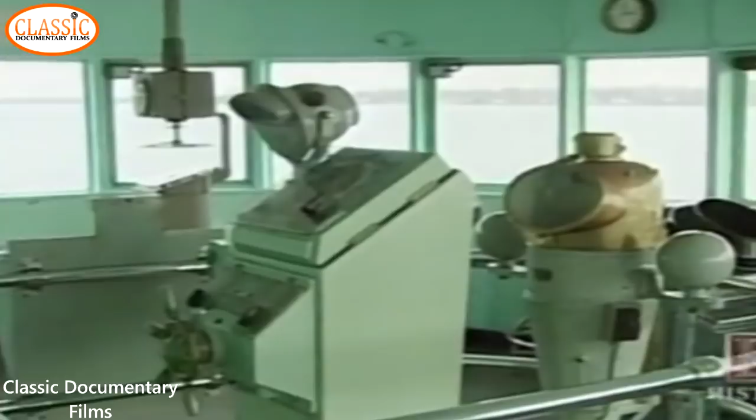This is the radar unit on the William Clay Ford. It's very similar to the one that was on the Edmund Fitzgerald. The Edmund Fitzgerald's radar unit, however, that night was out. For whatever reason, both units didn't work.

Why both of the Fitzgerald's radar units didn't work remains a mystery. There were no reports of problems before the ship left port. It's possible that the huge waves or high winds disabled the antennas on the Fitzgerald's roof. But the Anderson battled the same storm without any radar problems.

The other option they had was to use the radio direction finder. With this, they could triangulate their course. However, the Whitefish Point sending station was out of service. On shore, the radio direction beacon at the Whitefish Point lighthouse didn't work. The storm had knocked out power, and the backup generator didn't kick in as it was supposed to.

These failures may have doomed the Edmund Fitzgerald.

At about 3:30 in the afternoon, McSorley reported to Cooper that one of the fence rails, part of the sturdy safety fences on each side of the Fitzgerald, had snapped. He also said 2 vent covers were missing, and the ship was listing to the side, evidence that water was entering the Fitzgerald. These were all signs of severe damage, but the ship soldiered on, pumping out water as it went.

Those first images of the wreck, and footage from many other dives over the years, showed that the ship lay in two pieces on the bottom of Lake Superior, with its back, or stern, resting upside down.

The ore pellets from the cargo hold were strewn about, and the middle 200 feet of the ship had disintegrated into small pieces. But finding the wreck didn't provide answers to the questions about what caused the Fitzgerald to sink, and why the crew never called for help.

More than 3 decades later, strong opinions still surround the theories of the ship's tragic fate. A Coast Guard investigative board looked into many possibilities. Probably the only one they could confidently rule out once the wreck was discovered was the possibility that the Fitzgerald had broken in half on the surface.

The ship didn't break in half because the bow would have floated for a while longer and the stern would have floated for a while, and they both would have disappeared a little bit further apart. Instead, the two pieces of the ship lay only a few hundred feet apart.

In terms of official findings, the Coast Guard report issued on July 26, 1977, concluded that water crashing on the deck and leaking through cracked and poorly sealed hatch covers was the most likely cause of the disaster. The seals on freighter hatch covers were often damaged during loading and unloading, and crews often skimped on the tedious process of tightening most of the hatch cover clamps.

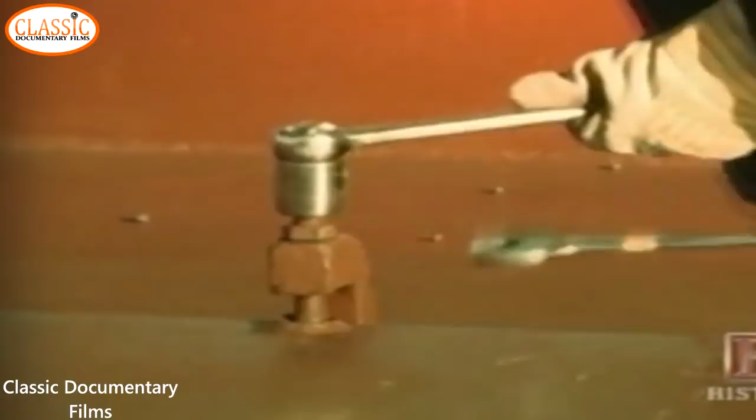Still, many people disagreed with the Coast Guard's theory. If water was leaking in through the hatch covers, then the pumps that were on - these 7,000 gallon per minute pumps, and there were 2 of them going - should have been able to keep up with as much water as these hatch covers would allow through leaking.

The Lake Carriers Association, which represented 15 shipping companies, protested to the National Transportation Safety Board, which issued its own findings on May 4, 1978.

The NTSB also focused on the cargo hatches, but in a different way. It felt the tremendous weight of the water crashing across the Fitzgerald's main deck, known as the spar deck, forced one or more of the hatches to implode and swiftly flood the cargo hold.

You can tell by the size of these things, the 729-foot freighter - these things weigh tons, and it would take an awful lot of weight to cause them to implode.

Finally, the Lake Carriers Association proposed its own theory, that the Fitzgerald struck bottom in the shallow waters around Caribou Island, a plausible consequence of the ship's navigation system failures. Hitting bottom could have caused a rupture in the hull below the waterline. The downed fence rail and missing vents McSorley reported near Caribou Island seemed to bolster that scenario.

This was serious. How serious? Not serious enough that McSorley thought he couldn't continue on. He had his pumps going. He thought he had it under control.

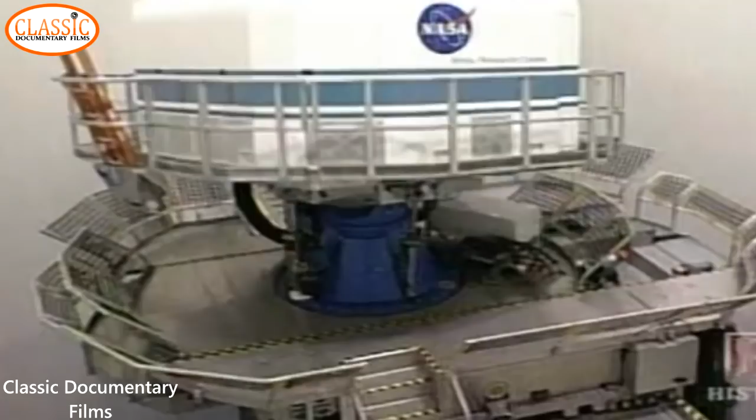To test the motion effects recorded from the US Air flight in 1994, investigators went to the NASA Ames Research Center in Northern California, home of the world's largest flight simulator. Unlike other simulators that simply pivot on a stationary platform, the center's vertical motion simulator can move 60 feet up or down and 40 feet side to side.

Pilots that we've had from all over the world who have come in to fly the vertical motion simulator say that it replicates flight like no other simulator they've ever been in.

Technicians loaded information directly from US Air 427's flight data recorder into the simulator's computers. Computers ready. Operate. The result, seen here using the same US Air flight information, was a chilling reconstruction of what the crew most likely saw and felt.

As we roll out, there'll be a wake vortex upset that resulted from a 727 that was flying ahead of the 737, and that started the maneuver. Right there you feel the wake vortex upset. The pilot then tries to right the airplane, but during that process the rudder goes over hard to the left, and as a result the airplane rolls uncontrollably to the left. It must have been terrifying in the cockpit.

Nothing from the work in the vertical motion simulator led investigators and motion experts to believe that pilot error or disorientation were factors in the crash.

They returned to the rudder control system, but could still find no sign of malfunction. Then, a vital clue: in June 1996, an East Wind Airlines pilot reported rudder problems. It seemed like the hydraulic system of his 737 was actually pushing back when he depressed the foot pedal that controlled the plane's rudder. Luckily, the plane didn't crash because the incident didn't occur during takeoff or landing.

This incident led NTSB investigators to examine how the rudder could have moved opposite of the pilot's control. They focused on the hydraulic heart of the system, the rudder's dual servo valve power control unit.

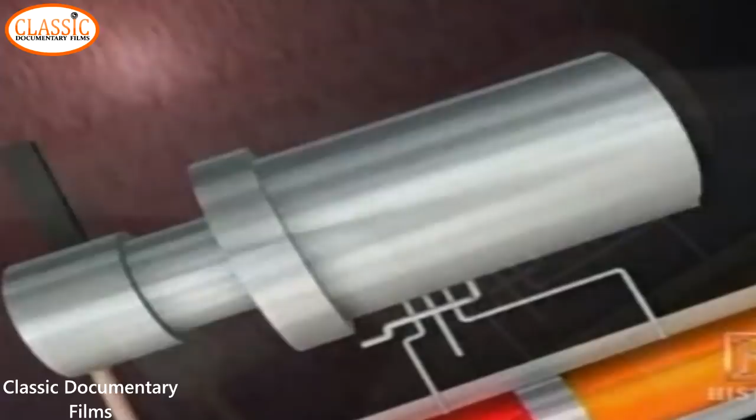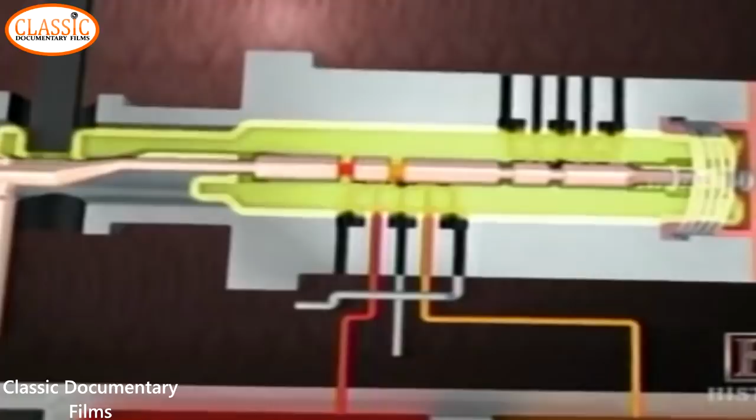It's about the size of a soda can, and inside is a valve about the size of a pencil that's got ridges in it, and it moves back and forth and ports fluid. That's the primary valve. Around that is a slightly larger valve, cylindrical in shape with ports in it, and that's the secondary valve.

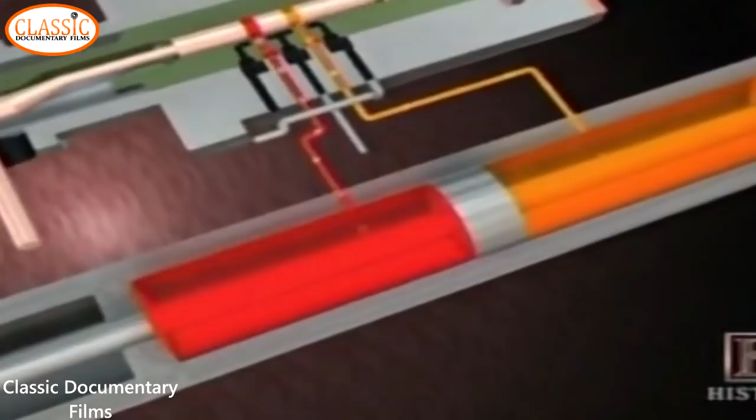When a rudder is operating normally, only the inner primary valve is supposed to move. Depending on which direction a pilot wants to turn, the hydraulic pressure either extends or retracts a piston, which then turns the rudder. Once the pilot's foot is off the pedal, the pressure is released, and the rudder returns to a neutral position. The outer secondary valve only moves if the smaller primary valve becomes stuck.

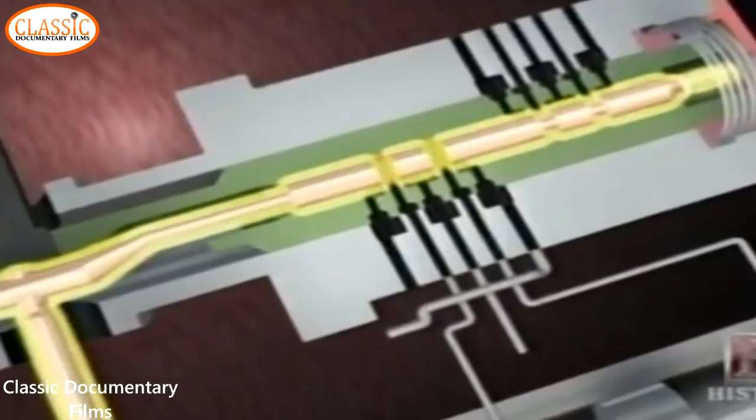Virtually all aircraft systems have both a primary and a backup, an important design feature known as redundancy in the airline business. But since the 737's rudder power control unit used two valves within the same hydraulic system, the valves were not totally independent of each other.

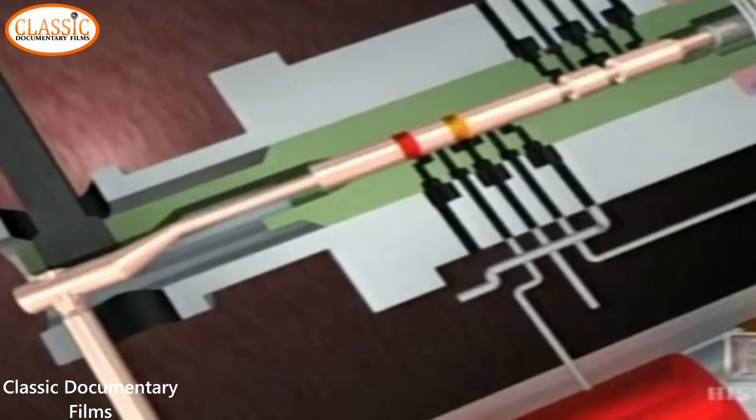In 1998, investigators discovered how the valves had created the deadly problem. We saw that if the secondary valve were to be jammed just slightly off neutral, and you put in a high rate command into the primary valve, you could misport the hydraulic fluid and cause the rudder to reverse operation. This would be very similar to driving your car.

You turn to the right, the car goes left. You probably will keep trying to turn to the right. You won't figure that out before you go off the road. The longest NTSB aircraft investigation in history was finally over, 4.5 years after the US Air 737 crash in Pittsburgh.

Instructors immediately taught 737 pilots ways to correct the problem, such as momentarily removing a foot from the pedal to release pressure in the event of a jam, and switching from the primary to the secondary hydraulic master control for the entire aircraft in order to free the rudder.

The training continues today because the new units with two completely separate rudder control systems are still being installed. In fact, the retrofit process won't be complete until near the end of the decade. However, the planes are still safe in the meantime, thanks to extensive pilot training. And the 737 seems destined to remain the workhorse of the industry as the design changes are completed.

In 1959, just 30 miles from downtown Los Angeles, a little-known nuclear disaster began to unfold at an important Cold War facility. The Santa Susana Field Laboratory, created by the government's Atomic Energy Commission and operated by Rocketdyne, played a vital defense role by producing powerful rockets.

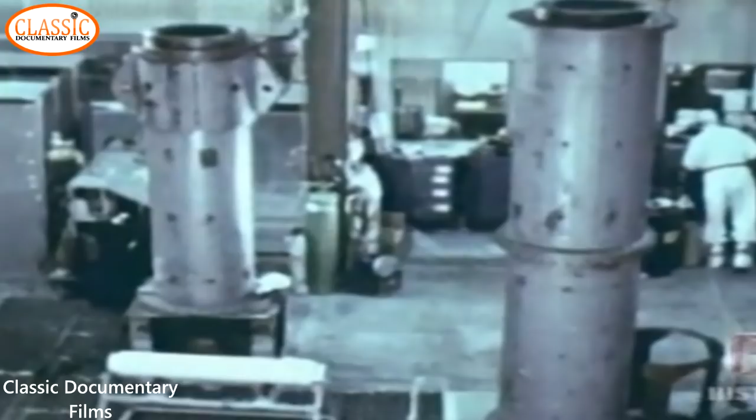The 2,800-acre site was built in the hills above Simi Valley, a town of 8,000 just west of Los Angeles' San Fernando Valley. Besides rockets, it was home to several experimental nuclear reactors, which the Atomic Energy Commission hoped could be commercially viable.

One of them used sodium instead of water as a coolant. It was known as the Sodium Reactor Experiment, or SRE. But the experiment would soon trigger a technological nightmare.

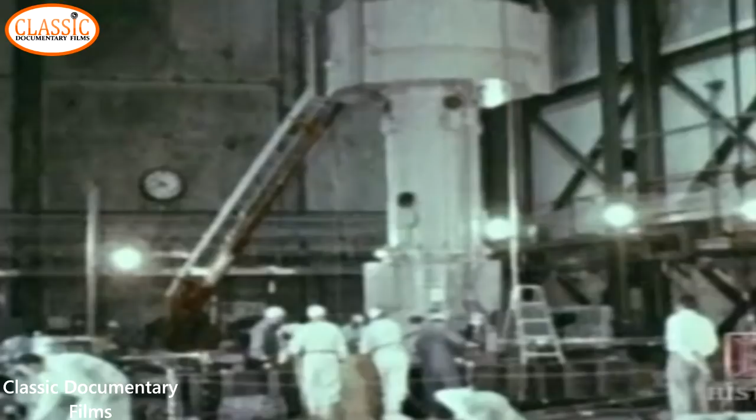This reactor was built in an era of nuclear cowboys. The Atomic Energy Commission came out of the Manhattan Project. There was a culture of secrecy, and a sense of excitement about pushing the limit on these reactors.

On July 26, 1959, technicians barely managed to manually shut down the sodium reactor when temperature and radiation readings quickly jumped. Then, after 2 hours of basic inspections, they made a baffling decision. They started up the reactor anyway.

When they dropped a camera into the reactor core, they discovered that 13 of 43 radioactive fuel rods were damaged and partially melted. And because this was an experimental reactor, a thick concrete containment structure, such a familiar and vital part of more modern reactors, wasn't required.

It's just built in an ordinary industrial building. And in fact, it was designed so that radioactive gases would be intentionally vented from the reactor to holding tanks and then out into the environment.

Exactly how much radiation went into the atmosphere is still a matter of debate, because the monitoring equipment at the facility could only measure very minor levels of radiation.

This was a much smaller reactor than the one at the site of the famous 3 Mile Island accident in Harrisburg, Pennsylvania in 1979. But because it didn't have a containment dome, the sodium reactor might have created a much bigger problem. The SRE was about 1/100th the size of 3 Mile Island.

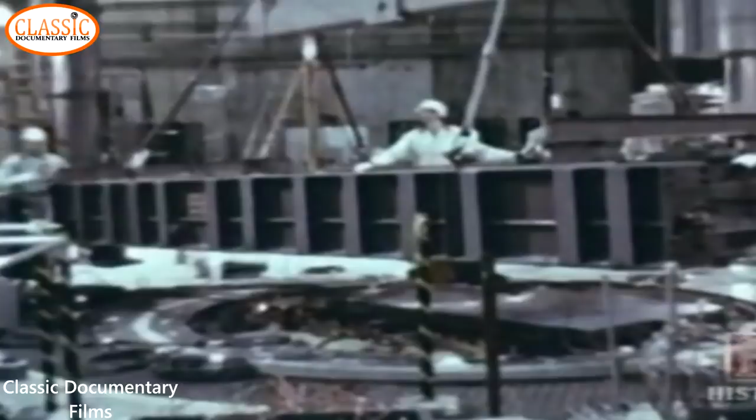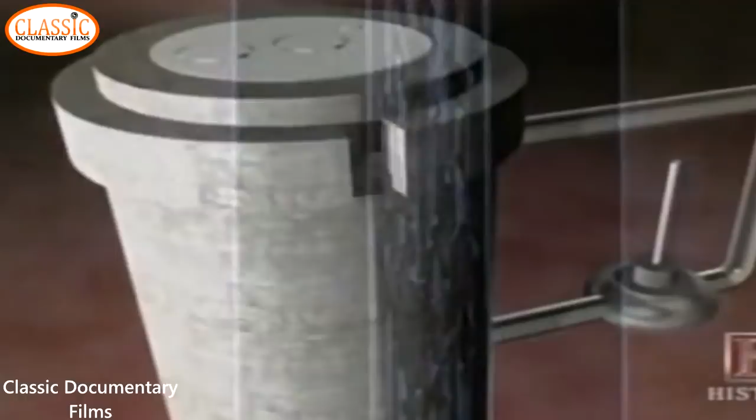It also explained exactly what went wrong inside this unique reactor, where molten or liquid sodium was used instead of water to remove heat from the swimming pool-sized reactor area.

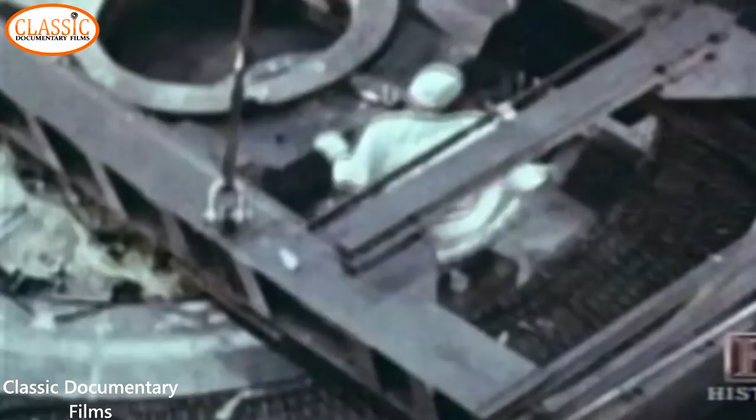Sodium reactors were being developed because there was a concern there wasn't enough uranium to fuel all of the nuclear reactors being built at the time. Sodium reactors never deplete their original fuel supply. Water reactors are less efficient, since they consume uranium and eventually need to be resupplied.

But the benefits of liquid sodium came with a price. Sodium burns in the presence of air, and explodes in the presence of water. So the reactors had tremendous danger associated with them.

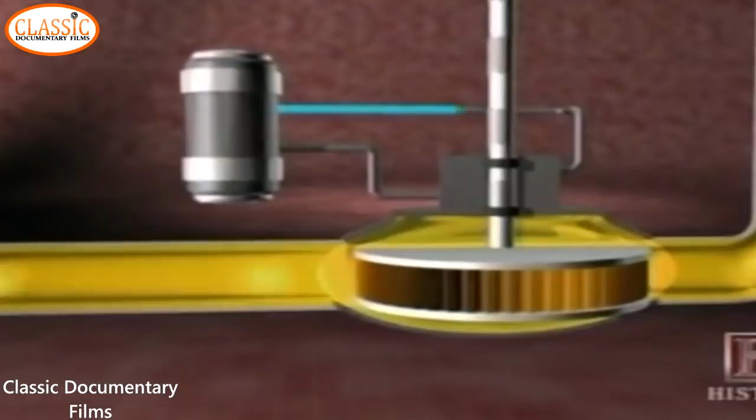Because water couldn't be near the reactor, a chemical known as tetralin was used to cool the bearings in the pumps that circulated the sodium as it carried heat away from the fuel rods.

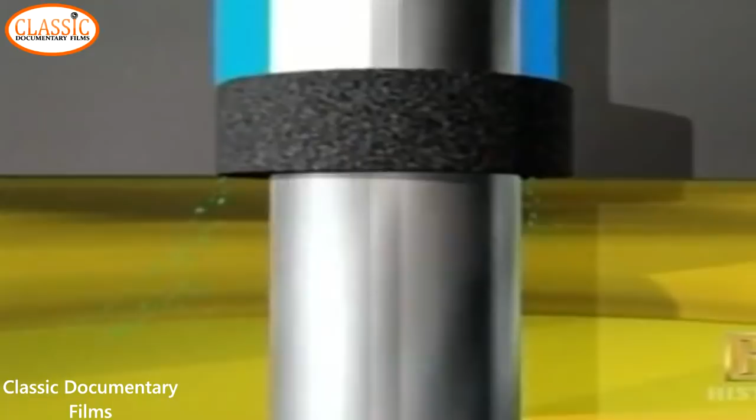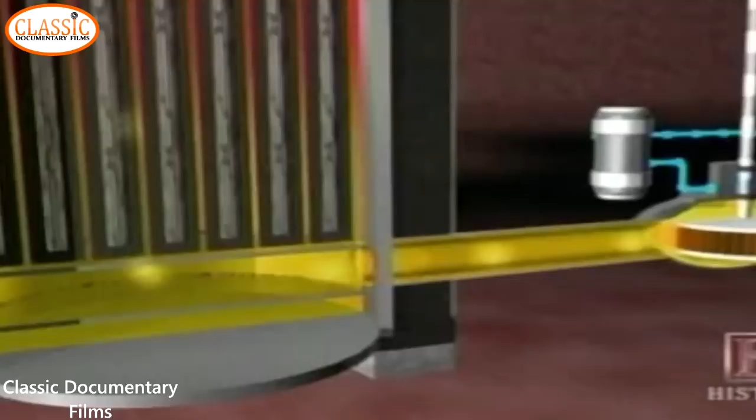Everything worked well until tetralin started leaking through cracks in the pump seals and into the reactor. The neutron bombardment inside the reactor core caused it to turn from an organic chemical into an almost glue or tar-like substance. As the tetralin approached the fuel rods, it partially blocked the bottom of some of the coolant channels.

When coolant flow decreased, the heat by those fuel rods increased and eventually reached melting point. What happens when the fuel starts melting is the radioactive byproducts, which have been created from reactor operation, have to go somewhere. So those radioactive byproducts go into the molten sodium, and some of those byproducts come out as a vapor, and in this case, went into the air.

Some of the radioactive materials, like strontium, are actually absorbed by the body into the bones and teeth, so they remain in the body for a long period of time, all the while releasing radioactivity that can harm cells and other parts of the body.

Workers who cleaned up after the accident or worked at the facility once it was restarted were at highest risk. The studies that were done of the workers by a team from the UCLA School of Public Health found that the workers who had the highest radiation exposures had tripled the death rates from cancers such as cancer of the lung, lymph, and blood systems, as similar workers at the site who had lower radiation exposures.

The University of California at Los Angeles was also responsible for bringing the story to the public. After the 3 Mile Island accident in 1979, some of Daniel Hirsch's students started wondering if anything like it had ever happened in Southern California.

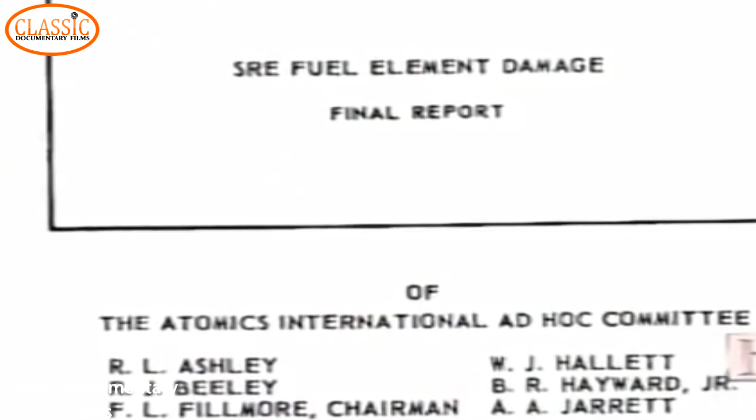We then released that to the press in 1979. So the AEC kept it secret, and it stayed secret for 20 years. The Atomic Energy Commission also managed to conceal accidents at 2 other reactors at the Santa Susana facility in the 1960s.

Today, the reactor buildings have been torn down and taken away, but years of cleanup work remain. Health effects on the surrounding communities have been difficult to study because of their large populations and the fact that many people have moved out of or into the area over the years.

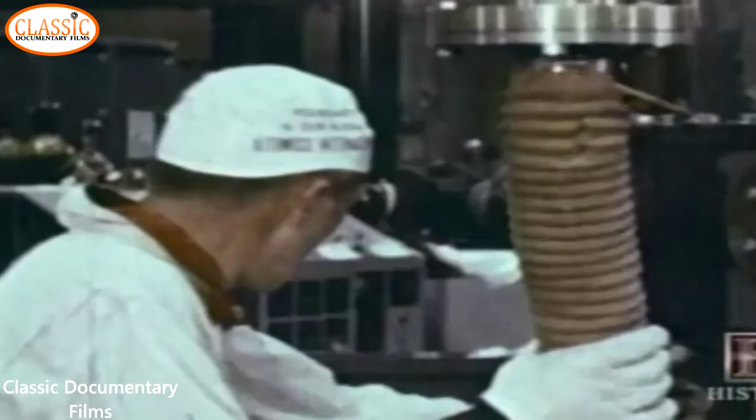Southern California's population continues to swell. People are living closer than ever to the site, which is now owned by Boeing. And because certain types of radiation released in the accident can remain at dangerously high levels for centuries, the decisions made at Santa Susana in the 1950s and 60s will continue to affect residents for generations to come.

25 miles south of Pittsburgh, in the heart of one of Pennsylvania's industrial valleys, along the banks of the Monongahela River, 4 million-gallon storage tanks mark the site of a past disaster. In 1988, when the oil storage facility in Floreffe, Pennsylvania was owned by Ashland Oil, different tanks located in the same spots held fuel oil.

On January 2nd of that year, a typically frigid winter day, a 40-year-old tank was being refilled for the first time after being disassembled in Cleveland, Ohio, and reassembled in Floreffe. Then, in less than 1 second, the tank cracked vertically, releasing a tidal wave of about 3.8 million gallons of oil.

When the tank split, the force of the weight of oil in the tank pushed the shell of the tank, the skin of the tank, back against this dike wall in this direction.

The oil rushed over the containment dikes in front of the split, hurtling toward other nearby tanks. When the tank that collapsed, which was behind me, released the oil, the tank that was formerly in this direction was dented by the force of the oil approximately 20 feet up on the wall of that tank. The tank was empty, but it gives you some perspective on how much force there was involved.

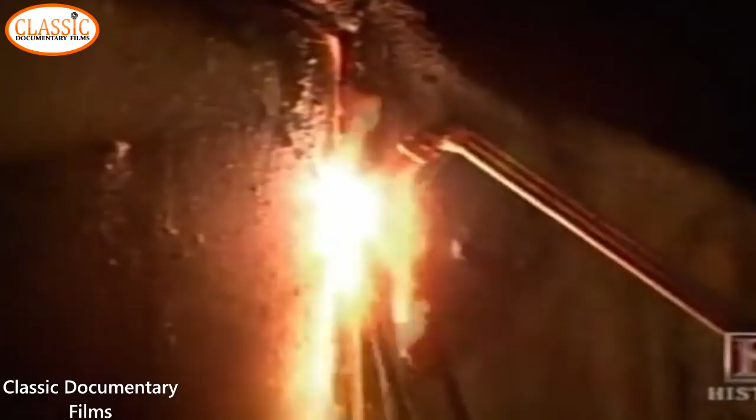But when the tank was put back together in Pennsylvania, the defect happened to be in an especially dangerous spot. The fracture occurred in this general location. This also is the location where a horizontal weld and a vertical weld come together. We call it a T-joint, and it's in this area that has particularly high stress concentrations.

Once a tank is built, welds, including T-joints, are inspected. To find defects that aren't visible on the surface, like the one in the Ashland tank, inspectors routinely use an X-ray system for metal, known as radiography. The joints where the vertical seam and horizontal seam come together is a typical place where these radiographs are taken. That provided the opportunity to possibly identify this defect, but it was not identified.

Following the investigation of the spill, state and federal agencies put new procedures in place. Pennsylvania implemented above-ground storage tank regulations so that tanks like this one that failed are inspected and tested routinely now, in an attempt to avoid situations like this in the future. The federal government also changed its oil spill requirements in terms of equipment that needs to be available and precautions that need to be taken.

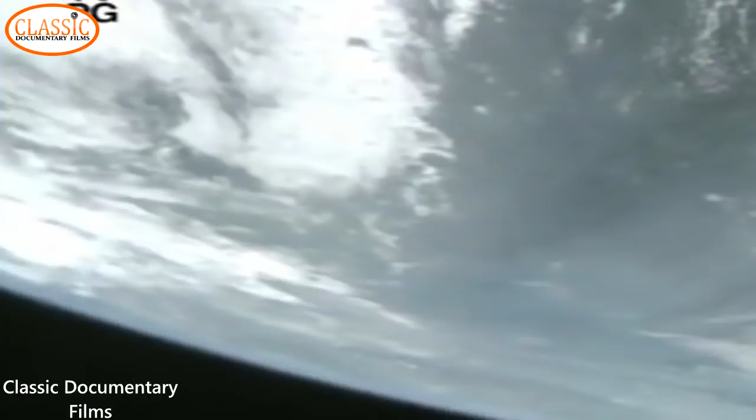On May 19, 1998, at 6 p.m. Eastern Time, the Galaxy 4 communications satellite high above the American Midwest suddenly rotated out of position on its own. This small movement created a disastrous ripple effect below.

Most of the 40 million pagers in service in the United States suddenly went silent for the first time in the 35-year history of the industry. Thousands of ATMs and credit card authorization services also failed, and several television and radio networks were unable to distribute programs to affiliates.

There were thousands of antennas on the ground, all expecting to send signals and receive signals back to the Galaxy 4. If it's pointed the wrong direction, it can't hear what the ground is trying to tell it, nor can it send signals back to the ground.

More than 80% of the nation's paging companies depended solely on the Galaxy 4. It took 3 chaotic days for technicians at PanAmSat, the operator of the Galaxy 4, to reroute the millions of pagers to other satellites and restore customer service.

Since the satellite is still in outer space, it's impossible to inspect. But the widely accepted cause of this enormous problem was something incredibly small: a short circuit within the positioning system, created by a microscopic phenomenon known as a tin whisker.

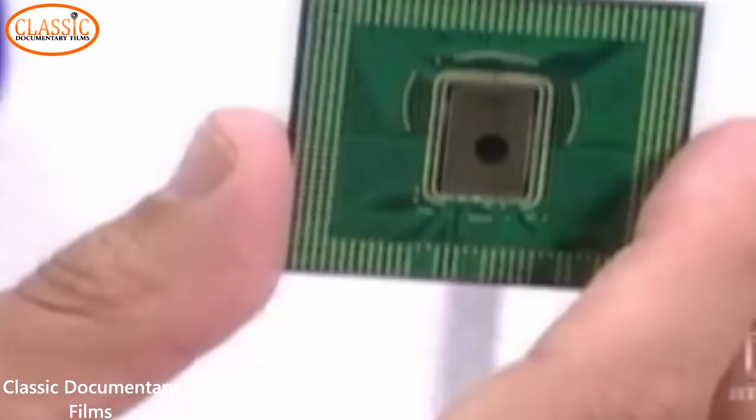The small metal leads on microchips electronically connect the chips to other components on a circuit board, allowing for the exchange of information across the system. These leads are coated with a conductive metal to prevent corrosion. Tin is the preferred coating material because it's widely available and inexpensive.

Tin whiskers are crystalline structures that grow spontaneously from this coating and can short-circuit microchip components by suddenly connecting leads that aren't supposed to be connected.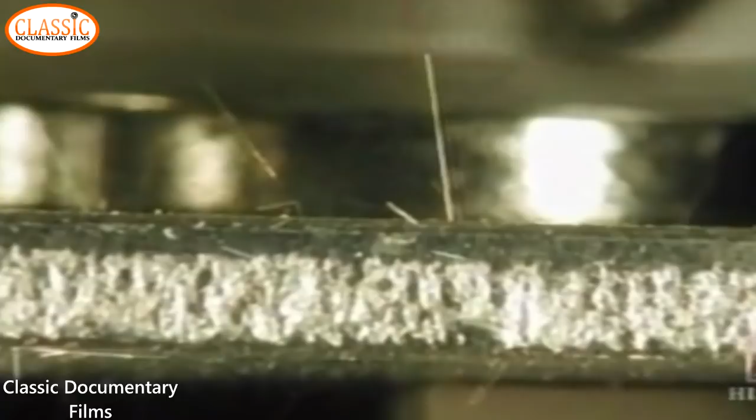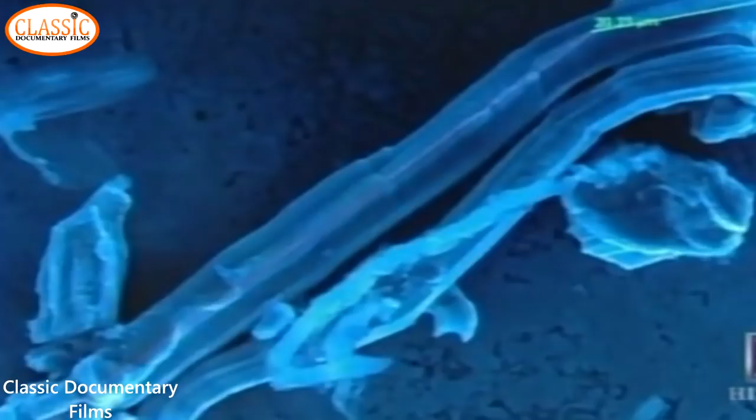Usually these leads are only 75 microns apart, meaning electron microscopes are needed to get a good look at the whiskers. This is a picture of 2 whiskers and maybe a 3rd whisker on the side here. To give you a sense of the dimensions, these 2 whiskers are maybe a quarter or at least less than half the diameter of a human hair. And the lengths are about 100 microns, which would cross between 2 leads of this kind of component.

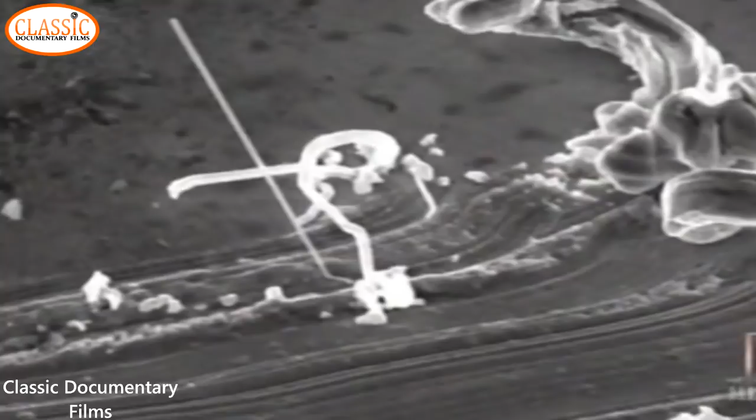The tin whisker that caused the Galaxy 4 to fail grew from the best intentions. Researchers identified whisker growth on tin and other metals as early as the 1940s. During the 1950s, experiments revealed that adding lead to tin created an alloy that greatly reduced whisker growth. But environmental concerns about lead caused many electronics manufacturers to switch back to pure tin, beginning in the 1980s.

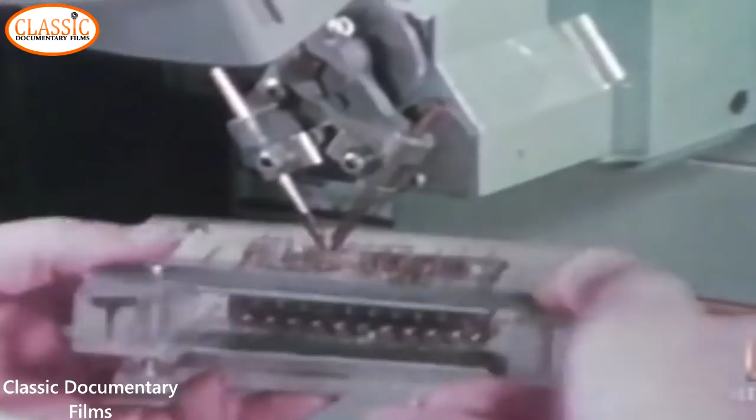Tin whiskers have been blamed for the complete loss of 3 satellites, and have partially damaged at least 4 others. But satellites aren't the only type of expensive and critical equipment that these tiny gremlins strike. They've shown up in F-15 fighter aircraft radar, air-to-air missiles, and heart pacemakers.

In the nuclear power industry, the tin whisker problem showed up in the unplanned shutdown of the Millstone 3 plant in April 2005 in Connecticut. That problem was due to a tin whisker crossing over between circuits in a logic board.

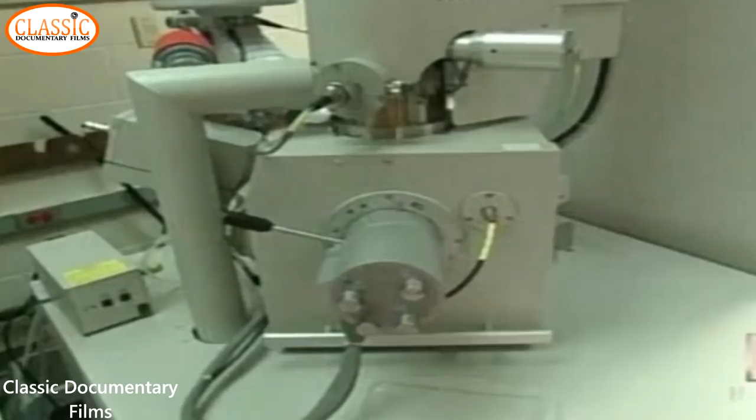Inside the University of Maryland's engineering department, long-term experiments are conducted over several years by subjecting closely spaced plates of tin and other metals to various temperature, humidity, and other conditions. From these experiments, researchers can determine if certain conditions inhibit or promote whisker growth.

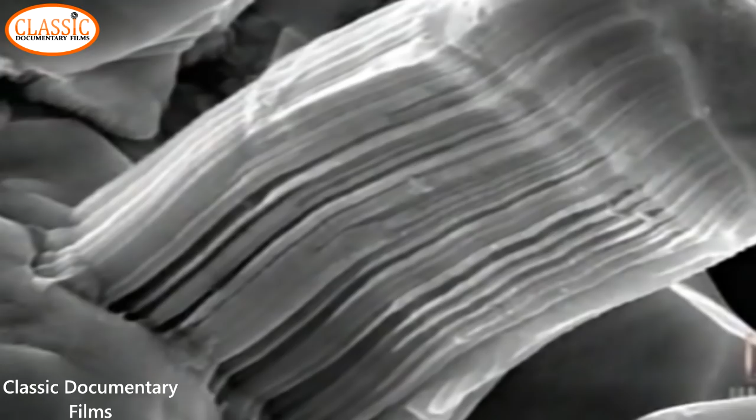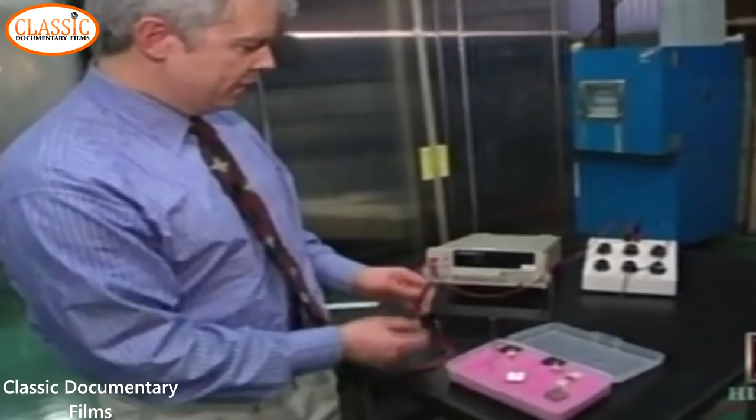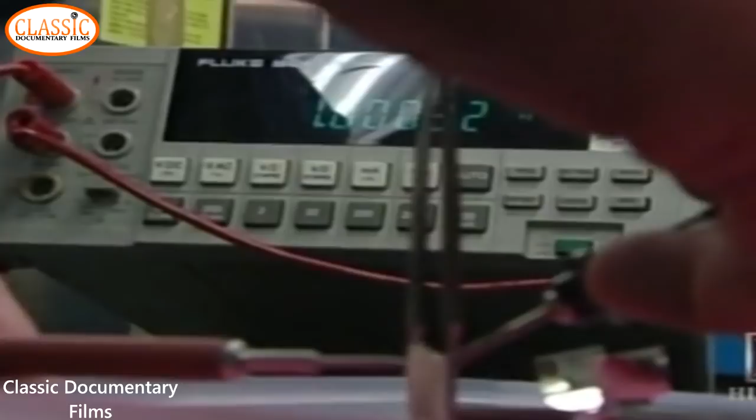These plates are being subjected to 50% humidity at 50 degrees Celsius. Pulling one out, we have a span of about 75 microns spacing between these two plates. Using this resistance measurement, if we have an open, we'll record nothing. If we touch these two surfaces and there is a whisker, we'll see a response, and as you can see, a response is indicated, which means there is a whisker bridging these two surfaces.

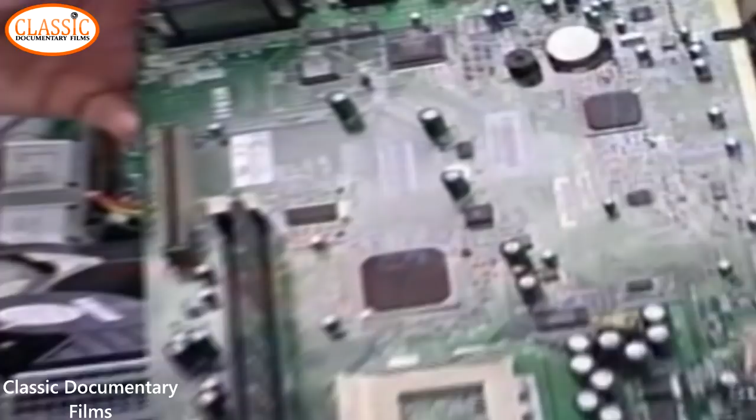But scientists still don't understand how to prevent these formations from occurring in the first place. Meanwhile, as electronics and microchips continue to get smaller and appear in more and more everyday products, the tin whiskers problem keeps getting bigger. Tin whiskers are a classic example of a very small thing causing a great deal of damage. They have caused hundreds of millions of dollars in damage and are capable of causing damage in the billions.

Until science can find a solution, it seems that all industry and consumers can do is wait for the next gremlin to strike.